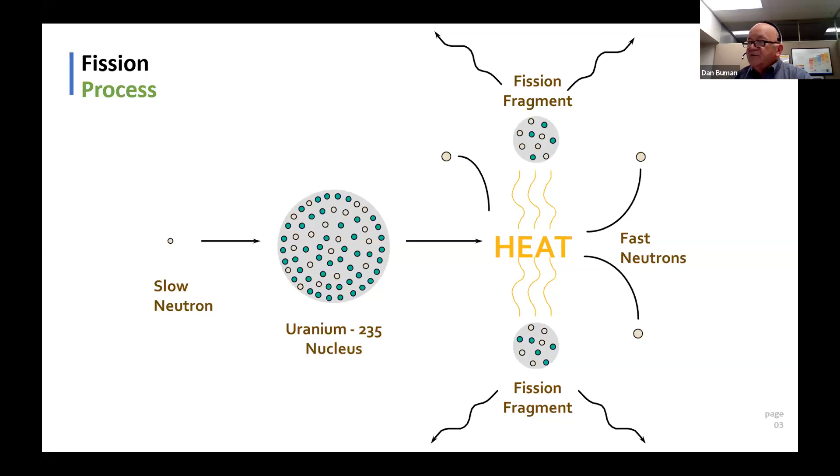Uranium-235 has a characteristic that if a neutron were to strike it at the right energy, it will excite the nucleus, and it will split apart into two smaller elements, and also produce between 2 and 3 neutrons that carry the chain reaction and keep it going. When that occurs, there's an awful lot of energy that comes off, mostly as heat.

So if you look here, what you see is a diagram. Start over here on the left-hand side. The vessel's full of water, so that heat starts heating up the water. That water turns into steam. That steam goes over, it turns a turbine.

The turbine comes on down and turns the generator, which produces electricity that goes out to the homes. All the steam coming from the turbine then comes down through a condenser, and at Cooper Nuclear Station we use Missouri River water that is pumped through. The condenser's at a lower vacuum, so if there are any sort of leaks, the river would leak in. There would be no way that anything would leak out, but it cools that steam back to water, and it's pumped back to the vessel.

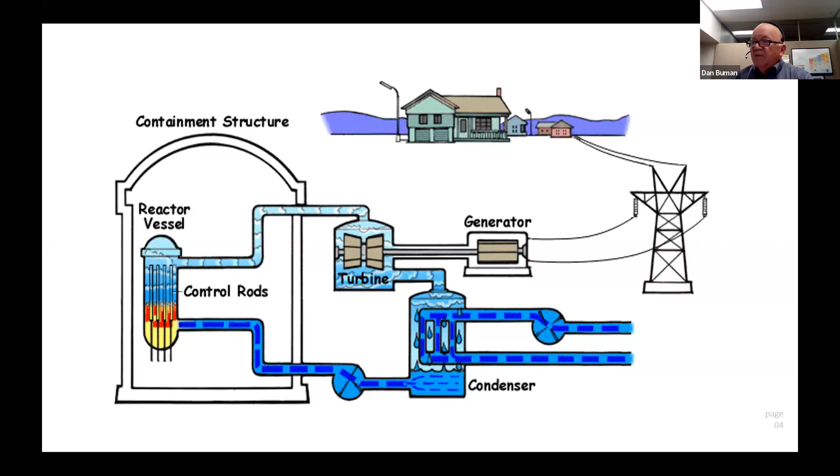And you see surrounding all of the vessel is a containment structure that is designed to withhold all the energy that's inside the vessel and be able to disperse that, so that it contains all the radiation. Now, this is the simplest way that it goes, because we heat the water directly and it boils.

But there are other designs, and the other current design that's out there is called a pressurized water reactor. In that particular one, once again, over on the left-hand side, you have heat going in, but the water is kept under such pressure that it never boils. And so that goes over to another heat exchanger or a steam generator, where the steam is going, and then that just cycles back. So it's basically an isolated loop.

When you start hearing about some of the advanced nuclear reactors coming in, you'll hear terms like sodium cooled reactors and molten salt reactors. All of those are talking about what they use to cool, to transfer the heat out of the core. And all of that is done in a step fashion very similar to this. So those are the two general types, but in both cases, we use that heat to produce steam to be able to turn a turbine.

When you get out to the turbine and to the generator, that's really no different than anything that you'd see at a normal gas plant or at a coal plant. It's the same technology at that particular point.

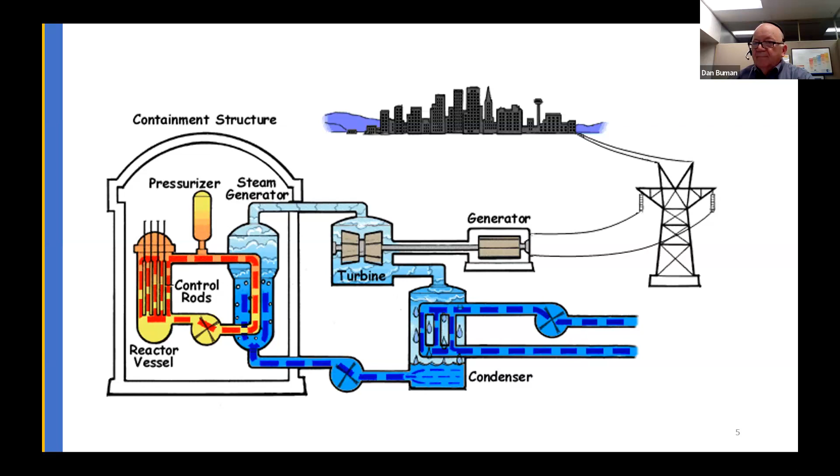So nuclear fuel is made up of a series of fuel pellets inside the core. Each fuel pellet is roughly about the size of a pencil eraser. There is what you see. So it's a very concentrated energy form. Again, we use about 10% of the total energy out of it. But that little fuel pellet has about the same amount of energy, as you can see there, as 17,000 cubic feet of natural gas, roughly a ton of coal, or about 149 gallons of oil.

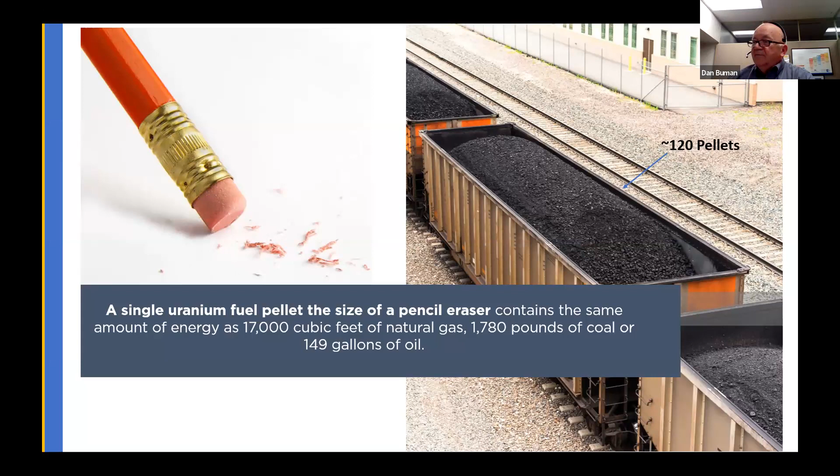So when you look at the coal train over there and take one of those box cars, when you do the math, that's roughly the same as 120 fuel pellets. These pellets all fit inside of a fuel pin. Here you're looking at a series of 4 fuel bundles, and you can see the little rods over there on the right-hand side. Those pellets are stacked in there, one on top of each other.

They're in a sealed tube. It's filled full of helium so that it's inerted. It's seal welded, and all of the fission products stay within that. What happens is that heat comes out, water comes up around the tubes, but the tubes protect that, and there's always a barrier between that and the water.

So you have 92 of those fuel rods in each bundle. We have 548 fuel bundles. If you do the math, you have roughly 19 million fuel pellets inside the core. We will run for a 2-year period, then we will shut down and refuel. When we put a fuel bundle in, it runs for six years. So every 2 years, we will shut down and replace roughly a third of the core, about 180 bundles.

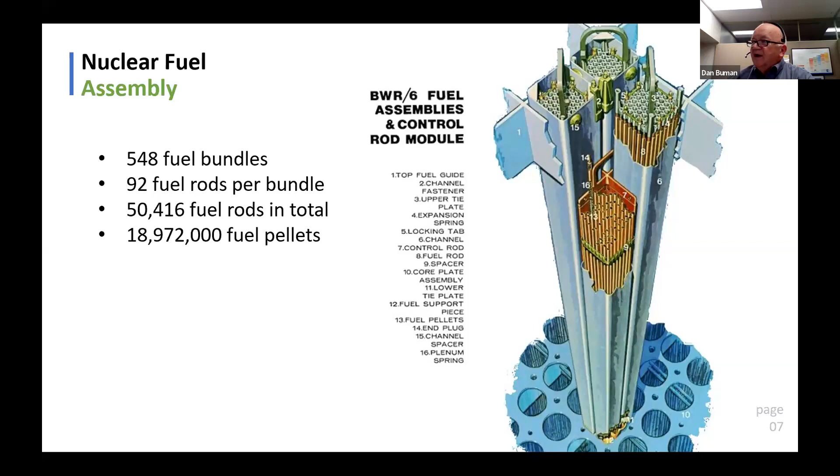So when you put that all back together and look at the math, I've got a little trivia question. All that energy is put in there when we start up from a refuel. Once we start up, we're going to be running for 2 years at 100% power the entire time frame. So following a refueling outage at CNS, looking at all the energy inside the core, how long of a coal train would it take to transport an equivalent amount of energy? Do you have a guess of how long that coal train needs to be?

So when you sit there and look at it and you do the math, it comes out to be 1,400 miles, about the distance from here to New York City. So that's the equivalent amount of fuel that we put in every single fuel outage. The reason why that becomes so important is because when you get into things like Winter Storm Uri, when you get into some of these other extreme weather events, we have all the fuel on site. We don't have to worry about disruptions and not being able to get the fuel in there, because we'll be continuing to operate.

So when you look at the actual fuel bundles and you get new fuel into the plant, what you're looking at here on the right-hand side are two reactor engineers that are inspecting all of the fuel bundles as they come in. You'll notice how close they are to them, and you'll notice they're wearing the white gloves. The white gloves are not to protect them from the fuel, it's to protect the fuel from them. We don't want to get any sort of oils or any sort of material or anything else on there. So the cleanliness becomes very, very important to us.

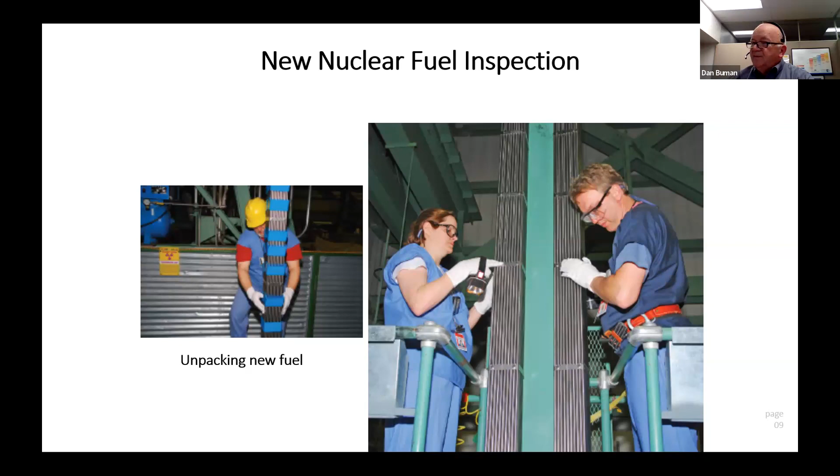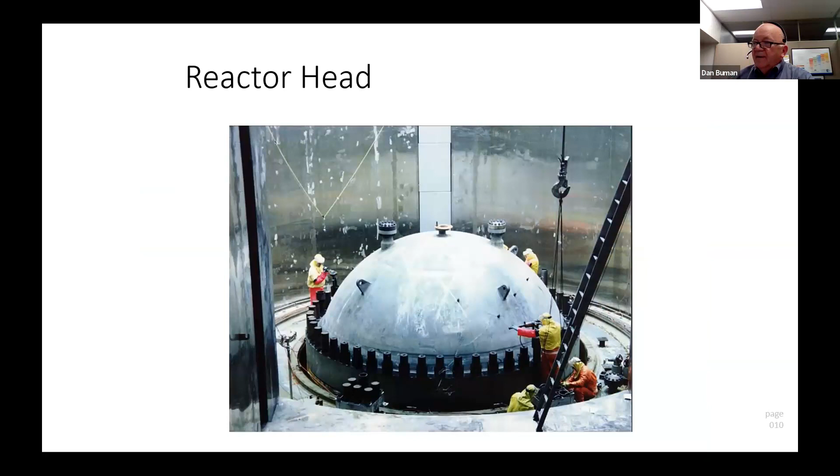Once those go in there, like I said, they go into the spent fuel pool, and then during the outage, what you're looking at here is the top of our reactor vessel. That's the reactor vessel head. So you can see the studs, they're actually loosening those up. When they get those big nuts off of there, they'll come down and they'll pick that whole thing up. And it looks like it's kind of in a stainless steel can. What will happen then is they'll basically flood all that all the way up, and it will come up to the very, very top.

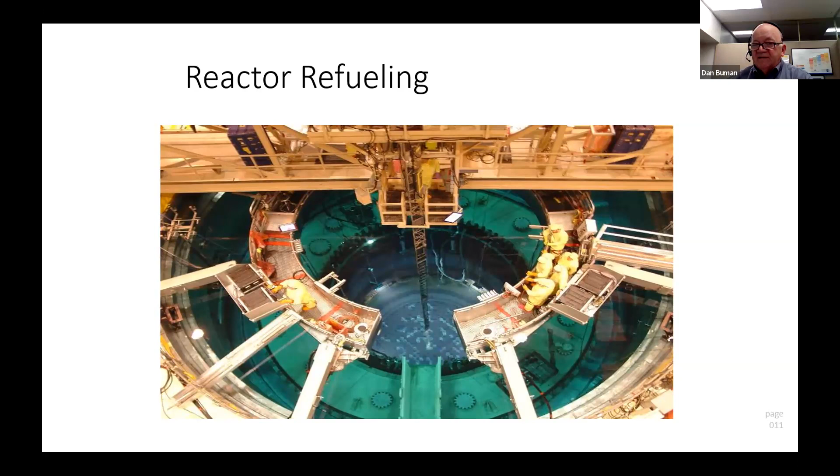We have roughly about 10 feet of water, and so the refuel rod is always underwater during this entire time frame. All this manipulation happens underwater, and as I said, in some cases they're down about 60 feet. The other circular thing that you see there is basically an inspection platform. You can see different technicians in there. They're doing various ultrasonic examinations and looking for indications, making sure everything is in tip-top shape.

Once it gets over into the spent fuel pool, we have fuel storage, and you see the top two items that are currently being used. So inside the plant, we have a spent fuel pool, and the picture over there is basically a fuel bundle that's in one of the spent fuel pools. So it's basically like a big swimming pool that's constantly filled full of water.

It goes over there, it goes into storage, into that egg crate that sits down in there. Basically, it keeps it safe, makes sure that reactions don't start. It's cooled and shielded under, like I said, roughly about 20 feet of water when it's sitting down in there. Typically that water is maintained around about 90 degrees or so, which gives plenty of time to be able to go in there, but it's an active component that we have, and we have pumps that are constantly running to keep that cool.

After that's been in the pool for a while. So we talked about a fuel bundle. We put a new bundle in. It stays in the core for roughly 6 years. It comes out. It sits over in the spent fuel pool. It'll sit there for at least 5 years, between 5 and 10 years. And then what we will eventually do is we'll take that away and put it into what's called a dry cask storage system. I'll show you some pictures of that. Those are the current storage facilities that we use.

What's currently being looked at, and the government is still working on this, is some consolidated facilities, some interim storage that would allow more efficient management. Right now, we store all of the fuel that we have right there on site. So we know where every single piece of uranium is, it's protected down there. There is a possibility, and one of the line items talks about it, that we could extract more energy. We only use about 10% of the available energy out of it when we're done.

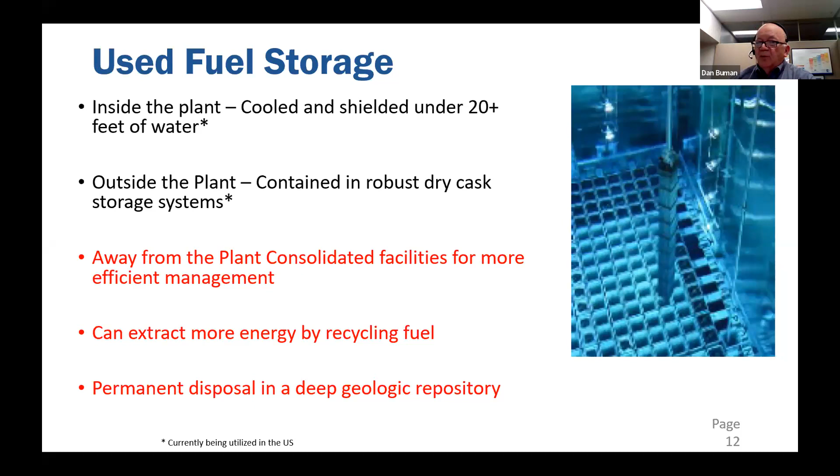So when we take that out of the spent fuel pool, we put them into something called dry cask storage. What you see on the left-hand side there is one canister. It has a bunch of different bundles in there. That's a vertical canister, or they have some that are horizontal canisters, like the picture right next to it, but it gives you some idea of how big those canisters are. And the picture down below shows you where the fuel bundles go in. So all of the fuel that's in there is solid ceramic fuel. So it has not come out.

It's not liquid or anything else. It's got water. So what we do is we put them in there. We will take that on out. We'll drain that out of water. We'll fill this whole canister full of helium, and it'll be a heat transfer, and it'll be able to go out.

And I'll show you out on the pad when we move it out and we put it out onto the fuel pad. It just sits there, and just natural convection will keep it cool. So it needs no forced pumps or anything else, no electricity. It just sits there. It's kind of like it has a chimney, so it has holes in the bottom where cold air comes in, it heats up, the hot air goes out through the top, and that natural convection will always keep it within about 2 to 3 degrees of ambient temperature.

So again, it's an inert atmosphere that's in there. You can see it's very, very thick, and there are no moving parts, no driving force is required for this. It's just all done very passive.

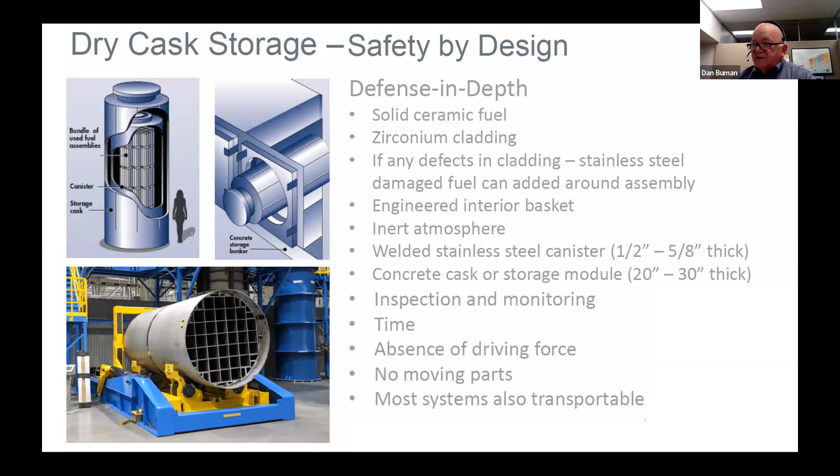So this is actually a picture of one of those casks. And so what you're seeing over on the left-hand side is one of the casks, and it's being removed up and out of the fuel pool. That is the spent fuel pool there. Like I said, it's like a big swimming pool that's down there, very clear water.

We put a canister down into the bottom of the spent fuel pool. They move roughly about 168 fuel bundles that are in there. They select the ones, making sure that they've cooled down enough, and they put them into there. They will pull that up and out, and they'll put a lid on it, and it'll be robotically welded down. Once it's welded, they will basically drain it, purge all of it out, and they'll fill it full of helium.

And from there, they'll lower it on down onto a heavy hauler that you see over on the right-hand side, and it gets installed into a concrete storage facility that you're seeing over there. If you look right next to the gentleman with a white hard hat, his head, you'll see a little opening, and that's basically the opening where air is allowed to come in. The air in there is heated, and then you can see up at the very top, there's little chimneys where it goes out of there.

We monitor that 24 hours a day, 365 days a year, always looking and watching to make sure we don't see any sort of temperatures. As long as there isn't any debris or anything else, like I said, it remains within about 3 degrees of ambient conditions.

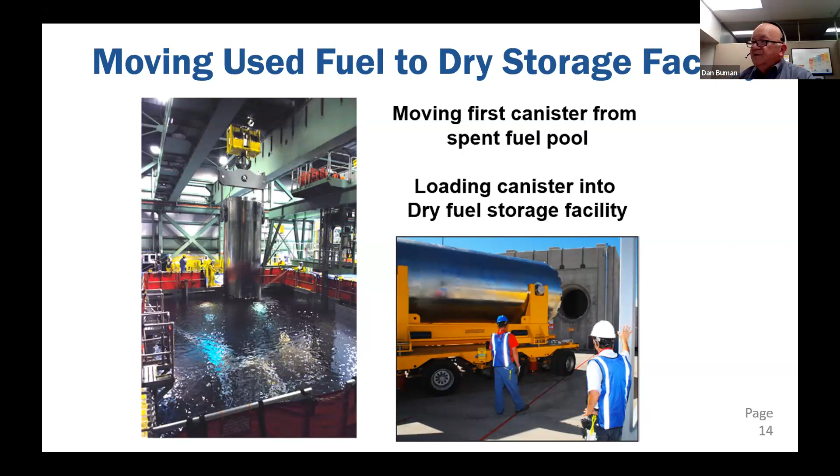And then when you look at it, you can see this is the facility. So behind each of those white squares is basically one of those canisters. And this is the fuel pad for all the fuel that's been used, except what's in the spent fuel pool, for Cooper Nuclear Station.

So a lot of people think about nuclear, and they're worried about nuclear waste, and I've kind of talked about the potential for recycling and everything. But when you look at the size of that, if you took all of the fuel that's been burned in the United States since the mid 40s for all commercial plants and were able to put it all onto a football field, it would fill the football field only 10 feet high. So it's very compact, it's not a large amount. So it isn't really a huge concern from waste.

We are working our way through. It's stored very, very safe. You may wonder, it's sitting here. It's protected, as you can see from the fence. We have security officers manning this to protect it from anybody trying to come in and do any sort of damage to it. All of that is being done. It's being maintained very, very safe.

You may think about it sitting down in the Missouri River Valley, and wonder, well, what about flooding? There's always flooding. Well, this is in an area that has never flooded. It's well above the floodplain. But even if it did flood, they can operate under 20 feet of water. In fact, this same design was actually over in Fukushima when they had the tsunami that came in. They stayed put.

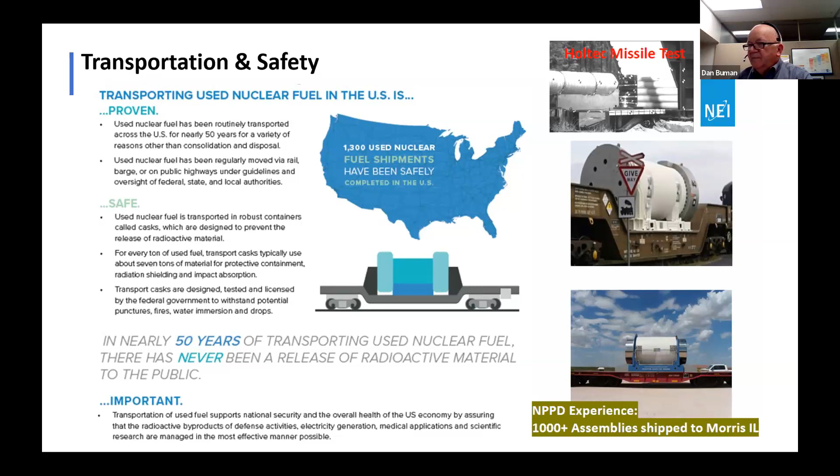So we're going to go forward now, and we're going to look at nuclear power and the broader electrical system and how that goes in there. But before I do that, I wanted to point out this picture that you're seeing over on the right-hand side. That is once again a picture looking down into our core during a refueling outage. You're looking through 60 feet of water. So again, you can see the clarity that's in there. Down at the very bottom, the silver looking items, that little ring, that's basically new fuel that's been put in. We talked about how we put in roughly about 180 bundles.

You see the little rod that's going down a little bit to the left of the center, and at the very bottom of it, I don't know how well it's coming up on your screens, but there is a fuel bundle down there at the very end. So they're actually moving one out and able to move through there. So again, the water clarity and the vision that they have is tremendous.

The little black squares down there are places where they've taken fuel bundles out, and they'll be shuffling that around to get the fuel into the right spot, just like what you do with a campfire. You move the coals around. That's the same thing we do. We keep the fuel bundles in for a total of 6 years, but after the first time, they'll get them moved around to make sure they get a nice even burn. So as I said, every 2 years we shut down, we do the refueling outage, and we start up.

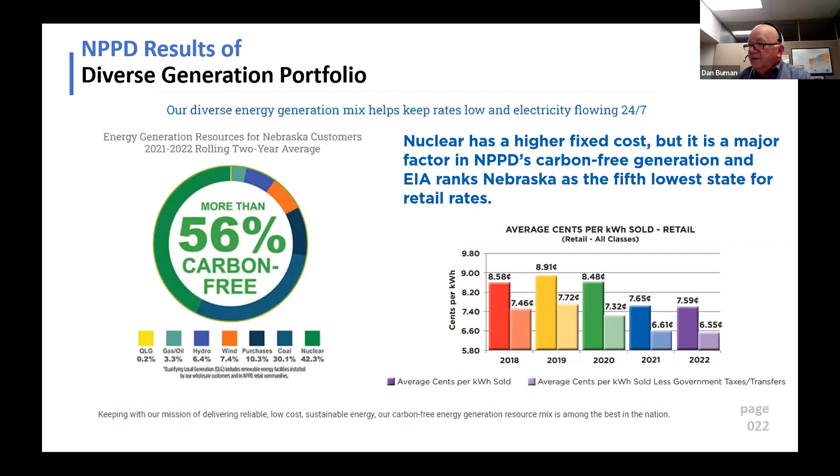The reason we do a 2-year average is every 2 years we shut down Cooper for about a month, and it has a big impact. So rather than reporting 90% one year and 40 the other, we do a rolling average. By far one of the biggest sources of energy for our Nebraska customers is nuclear at 42.3%. Nuclear has a higher fixed cost but a very low variable cost. By mixing that with our other sources, EIA ranks Nebraska as the 5th lowest state for retail rates, and you can see our retail rates have been on a lowering trend since 2018.

So there's a lot of discussion about decarbonization and how does nuclear fit into it? Well, nuclear has no emissions, so there is no carbon. So we basically are a firm load. NEI had actually conducted studies, and you can see this is quoted from a study that they were looking at.

And what our consultants have told us also is that as you're looking at reducing your carbon emissions, you can reduce about 90% of it with some added costs, but getting that last 10% is what's really, really difficult, and really starts driving up the cost.

And so what you're seeing here on the very bottom is 2 different graphs that say northern system, and what you see on the vertical axis is the average cost of electricity. They used this study at different points, and they have 2 different scenarios here. The first one was in the system where there was no firm low carbon load.

And you can see that as they started bringing the emissions down, going from 200 and trying to drive it down to 0, the price of electricity went up very, very rapidly. Over on the right-hand side of that graph, they've added in some sort of firm low carbon source, something like a nuclear power plant that's able to generate with no emissions. And now you can see that driving it down to 0 is a much lower proposition.

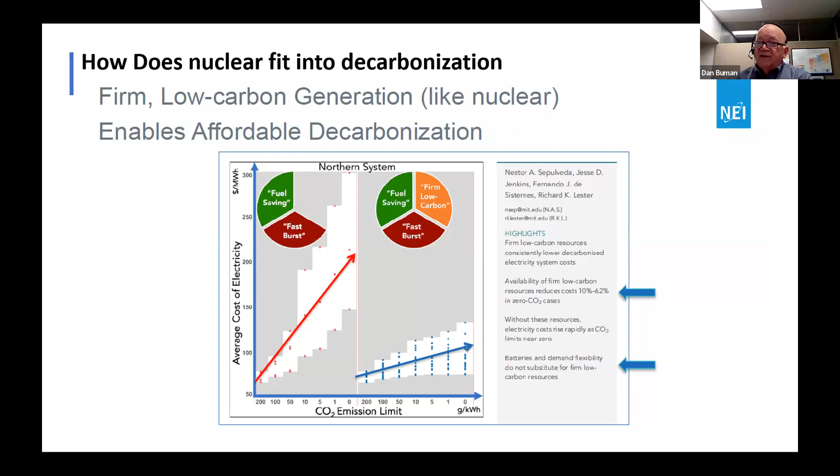I've just been focusing on electricity thus far, but there are other things we could go into. EPRI has studied some of the advanced nuclear that has increased margin and a smaller footprint, capable of not only generating electricity, as shown in the orange, but also taking the steam and using it directly in a high temperature electrolyzer to produce hydrogen. It can also be used in a distillation plant to provide clean water.

And people don't think of it, but the city of Lincoln has a district energy plant with boilers providing all of the cooling for the downtown state buildings and some of the university buildings. They use the steam through a steam chiller for cooling and also steam for the heating. So if you start shrinking these nuclear islands down and having a smaller footprint, you have the capability to go forward.

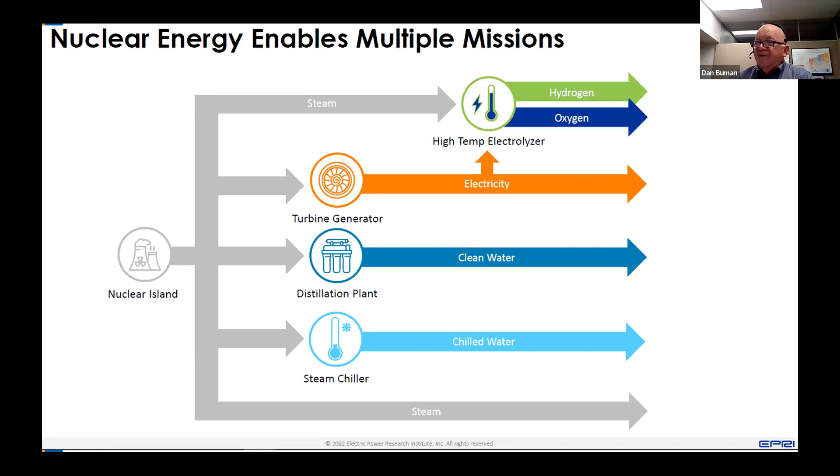And so that's why you're starting to hear so much about small modular reactors and some of the advanced nuclear. So if we're looking at the future, we need to start off with the fact that we have nuclear in the plant right now. Cooper's licensed to operate to 2034. We have been maintaining the plant over the time frame such that the extension to 2054 is very feasible.

We've already been investing; all the pumps have been replaced. The major transformers have all been replaced. Over the years we've been investing as we've been going, and based upon that replacement and upgrade, we have a very feasible path for an extension out to 2054.

We did conduct an integrated resource plan looking at our long-range generation needs through 2050, and it recommended that we look at extending Cooper's license. We've done a feasibility study, and at the NPPD board meeting this week, we're going to be asking the board for a final decision to start going forward with the effort to extend the license from 2034 to 2054.

What we do when we extend the license is we're going through a lot of analysis. We're looking at equipment, looking at trends, making sure we have aging management programs to be able to detect if there's any sort of wear. We do additional inspections. So this is all kind of ongoing. So we've already been doing that for the last 20 years. And what the feasibility study said is that we don't have any sort of major risks in that area. And so we'll be going forward looking at that.

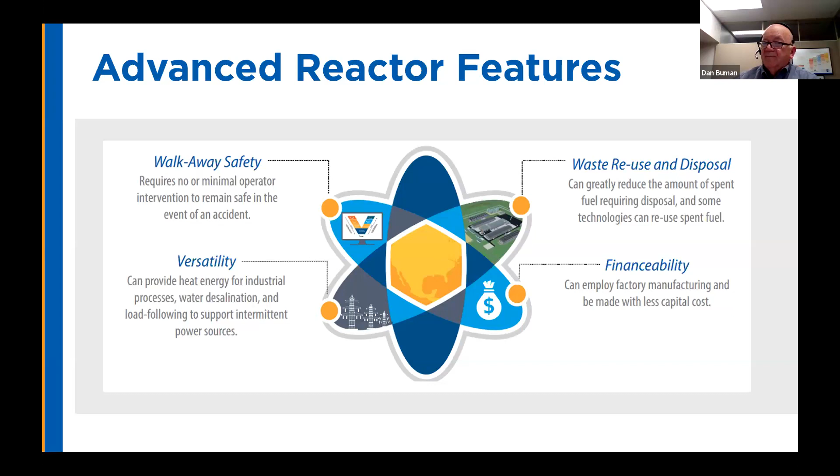They range from microreactors of 1 to 20 megawatts that actually fit on a flatbed truck, mobile and deployable. If you remember, there were a couple of dots up in Alaska. Those are some Department of Defense facilities. They're looking at some Army bases up in Alaska. They're at the end; they have to truck all their fuel in. They're looking at some of these microreactors to power the entire site.

A lot of them are in the range between 20 to 300. Those are called small modular reactors. They're built in a modular fashion. In this particular one, you're seeing a bunch of different vessels in there. The idea is that you build a containment structure and you're able to put in one and expand it. So you can put in 2 plants, 4, 6, 8, all the way up to 12. You can build a facility that would store 12 of them, and if you don't have that load growth right now, you'd be able to add that on in the future.

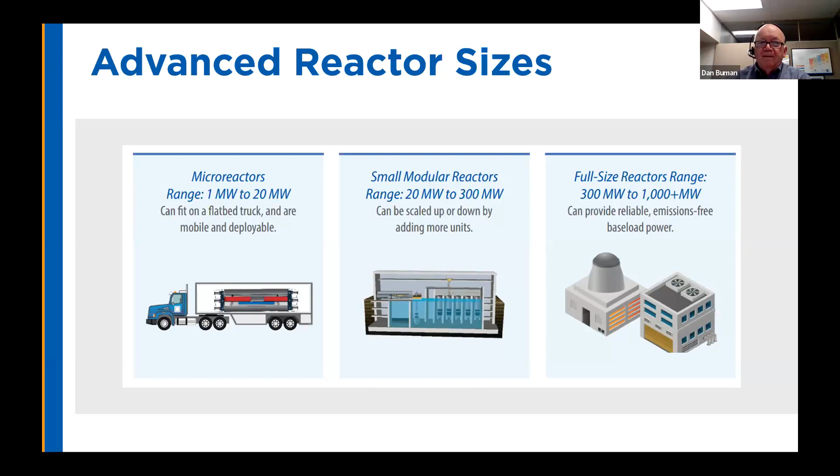And then some of them are the full size we talked about, which are up to 1,000 plus. Some of those just came online over in Georgia. They're using some advanced features, a lot of passive design, but they're a much higher energy output. And there are types of advanced reactors. Currently all of the commercial reactors are water-cooled reactors at this particular time frame.

So we use water, and either it's a pressurized water reactor or it's a boiling water reactor. But now what you're seeing there, you see the small ones. Again, these are some of the vendors. There's probably over 30 different vendors out there that are vying for the money. There's been a lot of investment by the Department of Energy. They've been spending over 500 million dollars just to be able to get these up. That allows them to take risks to go out for first of a kind.

So you see the NuScale there, the light water small modular reactors. That's a technology that comes in. That's what was being built in Utah. They've decided not to carry that one forward. They weren't able to get enough customers for the ultimate electricity, so they've backed away from that. But they're looking at other locations, and they're actually looking at some areas in Europe where the first of those may be going.

High temperature gas reactors. So instead of using water to cool the core, they use basically helium going through there. Again, it's operating at atmospheric pressure. They have encapsulated fuel. It's constantly being refueled, so there are no time frames where you have to shut down for fuel. It's just running through there. Again, it's non-water cooled, and with 4 of their units, they would be able to come up with a 300 megawatt site.

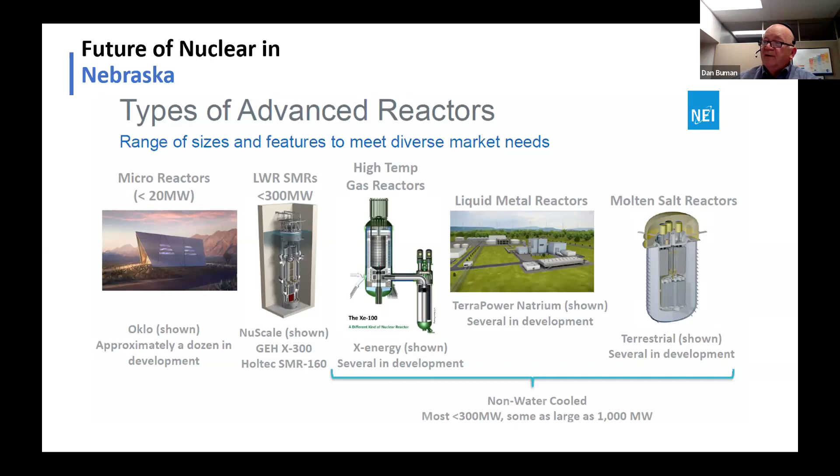But all of these different types of designs have been around since the 40s. So these are not brand new, gee, we've never tried this, don't know if this is going to work. They've been around in very small amounts and been proven very safely. You look at the US Navy as an example, with all the submarines they have, they've had an excellent safety history. Again, they're very small reactors, much smaller than what we've talked about, and they've been able to use passive designs. And with that, that's all that I have, unless there's questions.

Okay, we do have some questions. Let me get into the chat first. I think you mentioned this, but one question is, do you think there is a future for small scale nuclear generation? Very much so. When you look at the micro reactors, there's actually an awful lot of interest. Their business model is very interesting. They've looked at the risks you would have for a small modular reactor. They would be operating them remotely. They don't believe they would need a large security force because there would not be that sort of threat.

So that is a possibility. However, the current regulations don't say anything different about one or the other, and so there would have to be some work with the NRC, and the NRC is trying to look at this and trying to look at risk based on the risks, saying are there some things that we could be doing. The NRC is tasked with making sure that we operate these safely, and that they can be operated safely, and I'm a very firm believer that yes, they can be operated safely.

Okay. We have a question here. I enjoyed the presentation. I wish more people were less emotional and more logical in regard to the use of nuclear power. We're going to need, I'm going to have to scroll down here, more power. We are going to need more power and reliable 24/7 power sources. Exploring and utilizing a diversity of power sources is a must. Well done. And I think we would all agree with that.